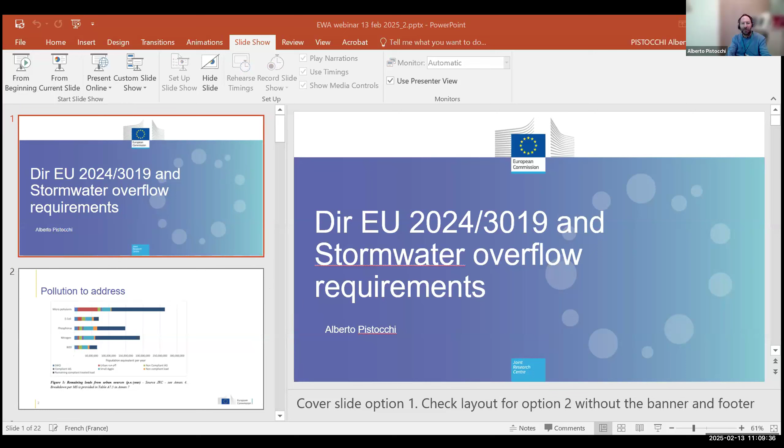That should be it. Can you see it now? Still, yeah, start it from the beginning just to see? No, it just does not switch into full screen mode. Maybe press F5. So we see you and we see the notes that you have at the bottom. Of course, it worked when we tried before we started. It's embarrassing, I'm sorry for this. Do you want me to share it on my side otherwise? Maybe it's easier. Yeah, I stop sharing then. Okay, thanks. So let me put that one here. Where I have it. I'm sorry. Let me find it again.

Yeah, maybe you can just explain quickly what JRC is while I look at your presentation, because I know it, but I'm not sure that everyone is familiar with the acronym. Yeah.

For those who are not familiar with the JRC, we are a Directorate General of the European Commission. We are tasked with handling, managing knowledge for policy. So we are a research organization, but we are also a knowledge management organization supporting all the policies of the Commission across the board. I'm particularly working in a unit dealing with water and ocean policies. So our angle is quite specific, but the JRC as such is a Directorate General of the Commission.

Particularly, we have been involved in the assessment of how the past directive was implemented and in the analysis of policy options that led eventually to the proposal of the recast directive. That is, of course, not the result of a scientific analysis alone, but rests on a number of assessments and quantitative policy analysis. If we can move to the next slide.

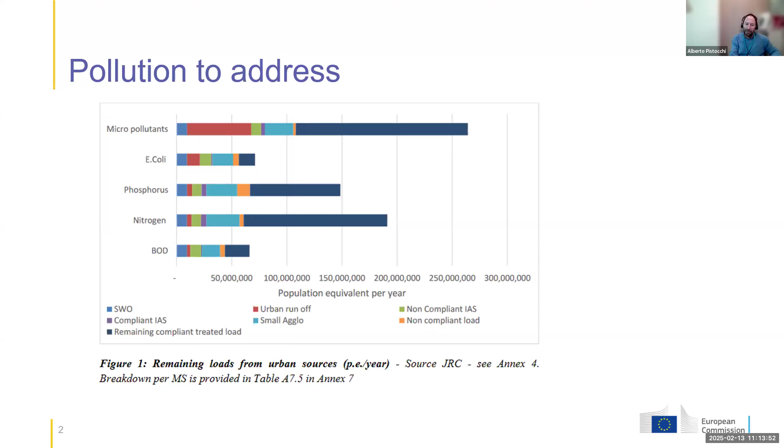Out of them, particularly micropollutants are a large component. Coliforms, pathogens, etc. Phosphorus is quite important, and nitrogen as well, whereas BOD is already treated to a large extent in all wastewater treatment systems. So what is out of the wastewater treatment plants is for now the most important component. If you move to the next slide.

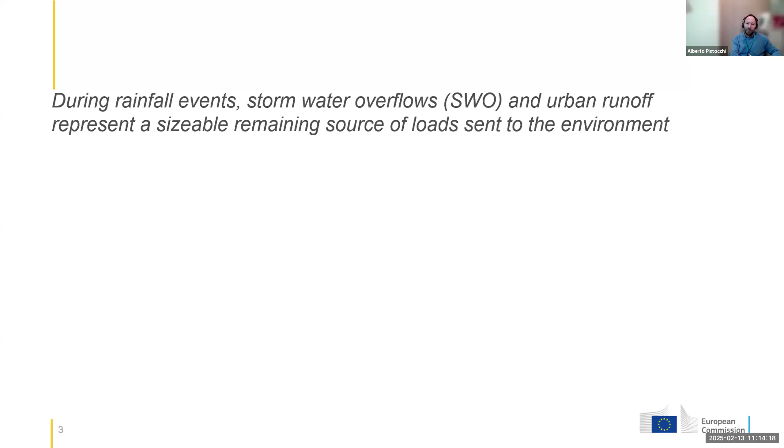Just a definition of what stormwater overflows are. This is a narrative in the impact assessment of the new directive that tells what we all know quite well, but just to focus on what's happening in our urban environments. During rainfall events, stormwater overflows and urban runoff represent a sizable remaining source of loads sent to the environment. These emissions are expected to increase due to the combined effect of urbanization and progressive change in the rain regime due to climate change.

Most of this pollution takes place during a relatively short period of time, bringing suddenly in the receiving water body a peak of untreated pollutants, including waste and litter from the streets, such as plastics and microplastics. Next. In case of heavy rain, we send directly to the environment part of stormwater overflows and urban runoff without any treatment. Next slide.

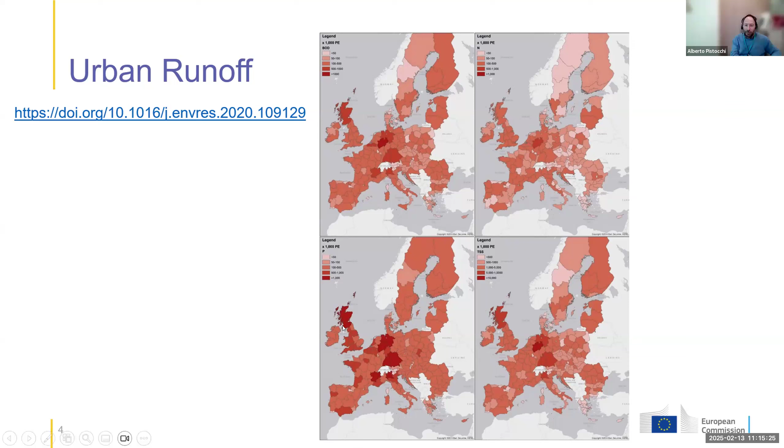This is an analysis that we had performed on how many population equivalents correspond to urban runoff, so only rainfall that runs off impervious urban surfaces, without passing through the buffering processes of natural soils. And you see that it's quite sizable. If you click, this is the distribution that, of course, corresponds to larger metropolitan areas and higher population density.

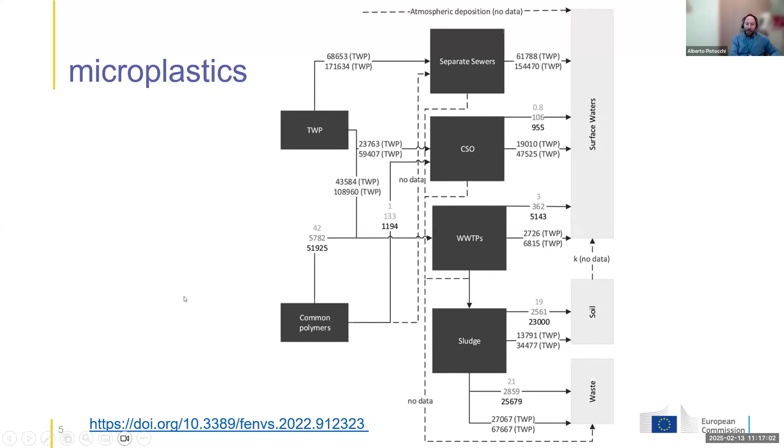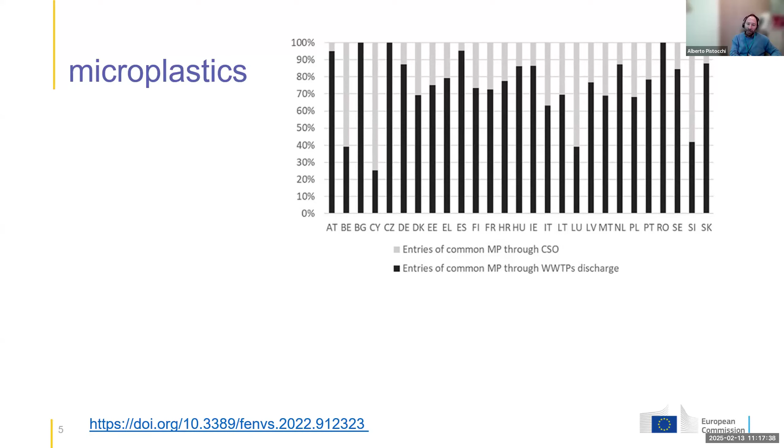But nevertheless, we tried, click please, to assess the relative responsibility of contribution to environmental loads of common microplastics, and you see that combined sewer overflows sometimes have a predominant role, sometimes they are less important depending on the countries and depending on how the combined sewer overflows are managed. So they can be predominant or not compared to the wastewater treatment plant discharges, but sometimes they are a problem. If you click next,

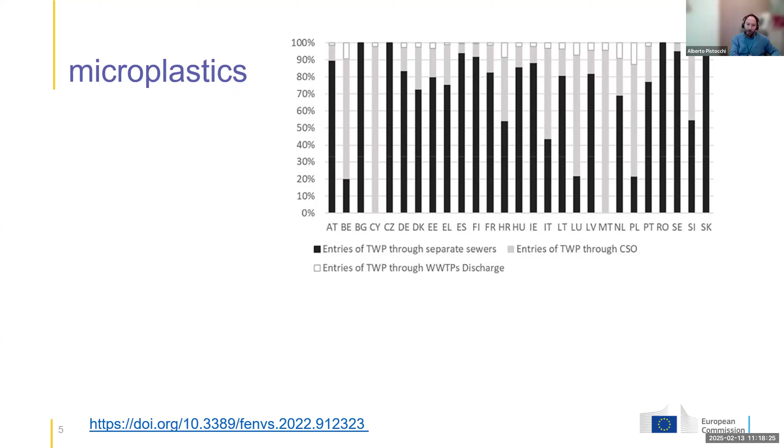when it comes to tire wear particles, not only combined sewer overflows represent an important pathway of loading to the environment, but CSO, combined sewer overflows, and discharge through wastewater treatment plants can be overridden by what comes through runoff. So what initially was considered basically almost as clean water in the old setup of the directive of 1991, that has been now recast with new provisions in the new directive. Click, please.

So what was the provision of the Urban Wastewater Treatment Directive in the past 30 years? Basically, collecting systems were supposed to collect and bring to the wastewater treatment plant household wastewater, so water that comes from excreta and from waste coming from domestic users. They could be combined with flows coming from rainfall or groundwater, but that was considered to be relatively exceptional, and there was no specific provision on how to handle the occasional overflows that were inevitable because of this combination of rainfall together with more stable discharges, more predictable discharges from households.

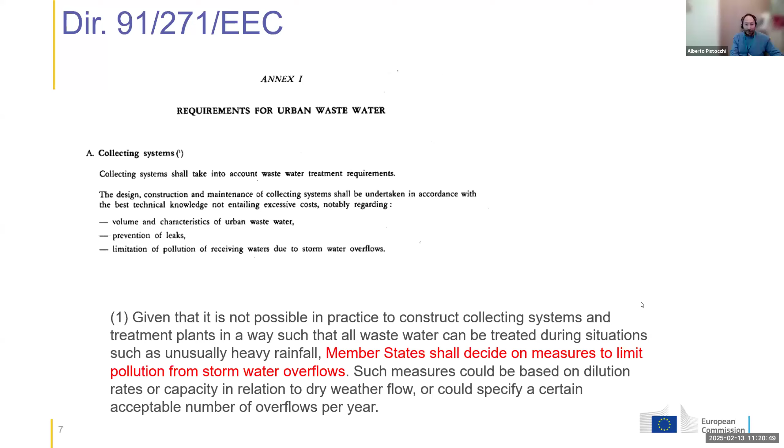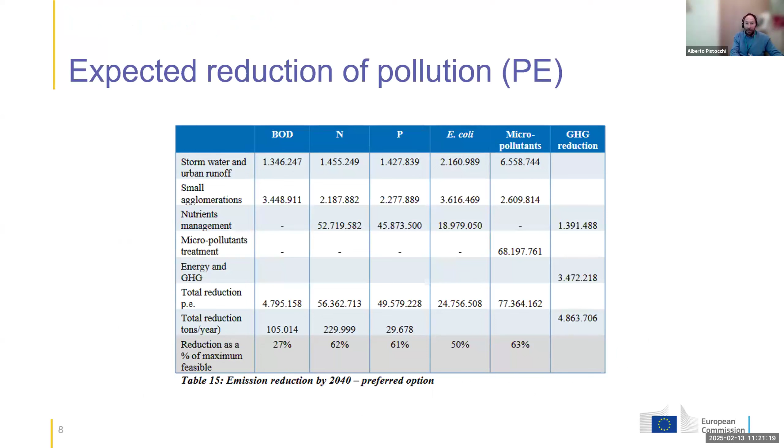Member states had the responsibility to decide on measures to limit pollution from stormwater overflows, including basically considering a minimum dilution rate when overflows were expected to happen. That was tantamount to what was foreseen in the old directive. Next slide. The new directive expects to address quite aggressively the remaining sources of pollution that I have highlighted above. So stormwater and urban runoff are supposed to be addressed substantially with homogeneous provisions applicable in the whole European Union that correspond to several million population equivalents depending on the contaminants that we are addressing. Next slide, please.

Urban wastewater, as you know, means, according to the recast directive, any of the following: domestic wastewater and the mixture of domestic wastewater and non-domestic, urban runoff, and everything together. Urban runoff is precipitation that is collected by combined or separate sewers, so it can be mixed with wastewater or not. And stormwater overflows mean discharge of untreated urban wastewater into receiving water from combined sewers caused by precipitation or system failures. So overflows may happen based on these two prerequisites. Next.

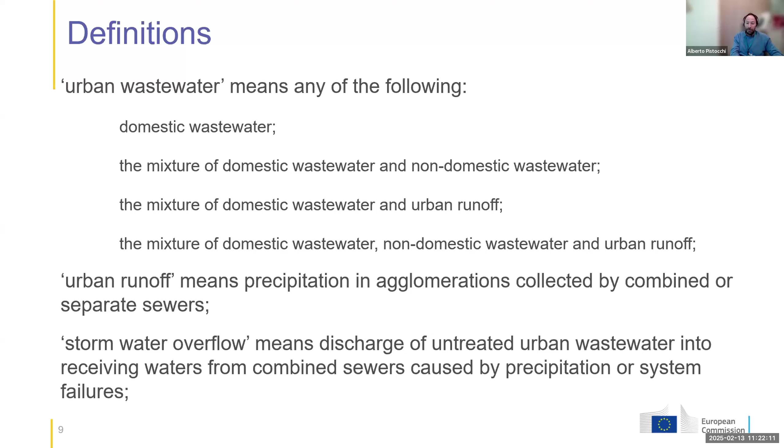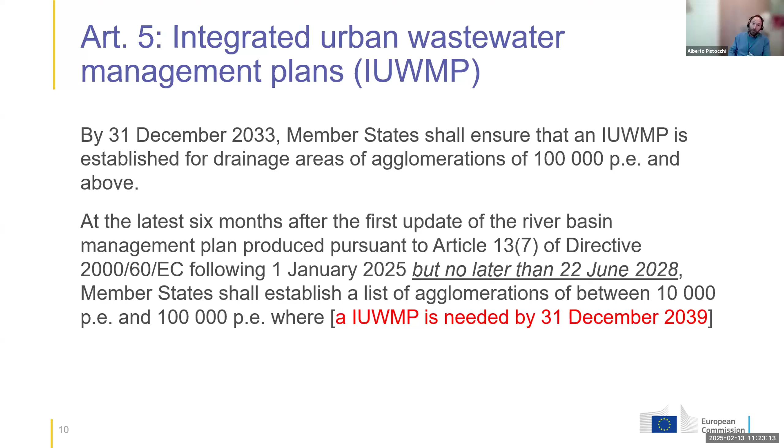Article 5 introduces basically the whole discipline of combined sewer overflows that are supposed to be addressed through integrated urban wastewater management plans for all large agglomerations above 100,000 population equivalents by 2033, so in 8 years' time. And for smaller agglomerations, based on the existence of specific conditions, for all agglomerations between 10,000 and 100,000 population equivalents 6 years later. And these smaller agglomerations need to be identified by member states according to guidelines on the assessment of risks that are being discussed now in the implementation phase of the Urban Wastewater Treatment Directive, but conforming to the principles already cast in the directive. Next slide.

For smaller agglomerations, a plan for stormwater overflows is needed when there is a risk for the environment or human health, and when stormwater overflows are identified to be a large component of the load to the environment. There's a threshold of 2% of the annual collected urban wastewater load calculated during dry weather, so assuming that rainfall is not discharging into the environment pollution coming from households or wastewater, domestic wastewater.

Relevant points, stormwater overflows should be addressed whenever they prevent the achievement of objectives of the water acquis. Sorry for the typo there.

The relevant points in separate sewers have been identified where urban runoff is expected to be polluted in such a way that its discharge can be considered a risk. So that's also another condition where a plan is needed when even simple runoff, so not mixed with domestic wastewater or industrial wastewater, can represent a source of pollution that poses risks. That's included in the directive, even though runoff per se is not considered to be wastewater according to the legislation.

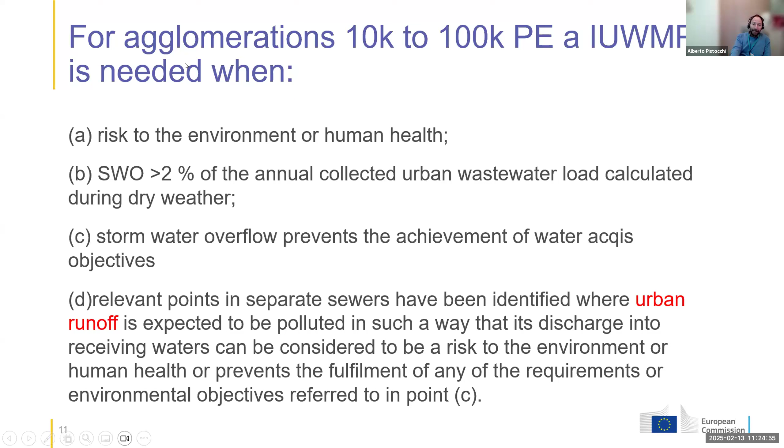Next slide. Next, sorry, Arthur.

Okay. These plans are supposed to contain basically an analysis of the situation, including what can be done with the existing infrastructure to mitigate and to control overflows, so to minimize the pollution released to the environment. And an analysis including climate projections and including an estimate of the pollution loads released into receiving waters in case of rainfall through an analysis that should be dynamic.

So in some cases it's possible to rely on very good monitoring networks, but most of the times the main approach to that is through a model, a calibrated hydrological hydraulic model of the network of a certain agglomeration.

For separate sewers, there's a requirement of including a detailed description of the monitoring requirements at relevant points of separate sewer systems where discharges of urban runoff are expected to be polluted. So basically identifying where there is a risk of pollution and what should be done in order to understand this pollution and characterize this pollution. Next slide, please.

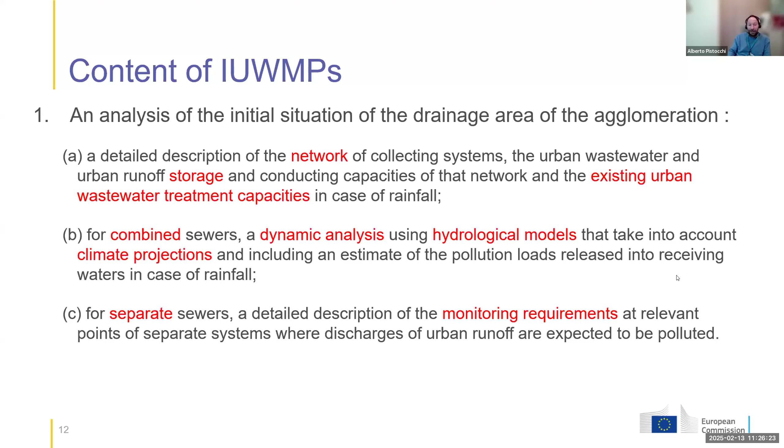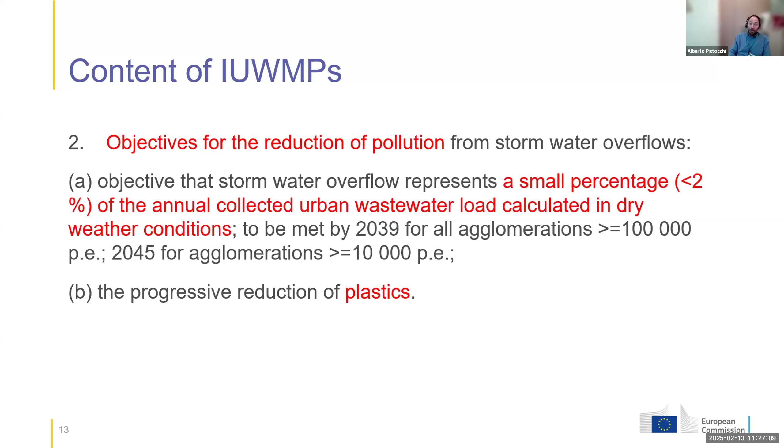Then the plan should lay out objectives for the reduction of pollution, and that is a complex topic. Basically, the plans should achieve that only a small percentage of the annual collected urban wastewater load, calculated in dry weather conditions, is released to the environment. Besides the progressive reduction of releases of microplastics, of plastics in general, to the environment. This small percentage should be less than 2% as an indicative target, and that has to be analyzed and discussed more specifically with reference to the specific situation in each urban water management plan.

Next slide, please. The measures to be taken to achieve the objectives need to be described in the plan together with a timeline for the implementation of those measures and a clear identification of the actors involved and their responsibility in the implementation of the integrated urban water management plan. Basically, this is an area where there will be a need to come together, the water operators, the municipality, governments, and urban planning in general, all the actors, urban developers, etc., that have to take into account the objective of minimizing releases to the environment.

So adopting measures that are not only in the form of pipes, tanks, pumping stations, and the like, but will mostly be through management of land, of urban land, in order to prevent the release of polluted waters from cities as far as possible. Next slide.

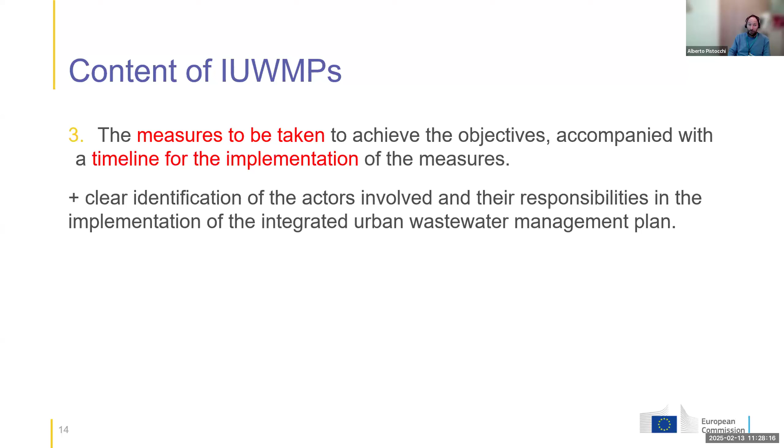When assessing the measures, that is what I was stressing now, the main focus should be on preventive measures, aiming at avoiding the entry of unpolluted rainwaters into collecting systems. Natural water retention, rainwater harvesting measures aimed at increasing green and blue spaces in urban areas that help reduce the loads to the networks and eventually to the environment.

Then, as a second priority, but still before embarking into any new infrastructural development, we should better manage and optimize existing infrastructure. There is scope for improvement in several situations where through, for instance, modeling and digitalization, automatization of the operation of certain infrastructure, you can improve the situation considerably, even though it's not addressing the problem to its full extent, probably.

And then only where necessary, adaptation or development of the infrastructure with priority to green and blue infrastructure, of course, but whenever needed, that's also the last resort option that is always available. Where relevant, water reuse shall be considered in the context of the development of these plans. So that's also a possible objective. Next slide.

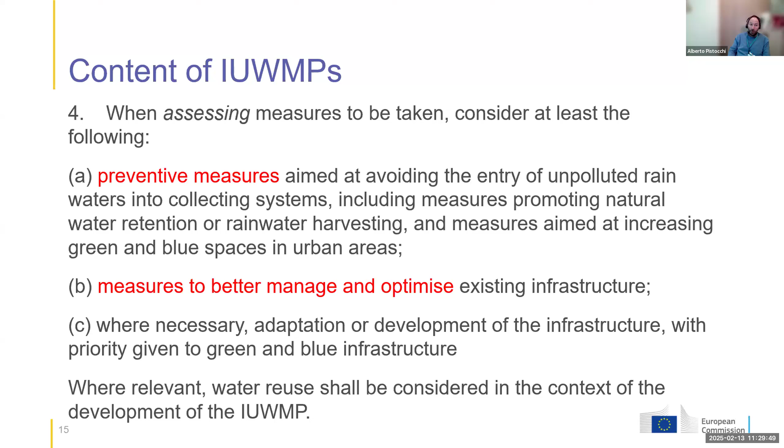This is a definition that we have. It's a very simple one: the dry weather flow content of an overflow. It's a definition that we have used in the assessment of policy options. Basically, even though rainfall that becomes runoff and is collected in combined sewer overflows is by no means unpolluted, so in some cases it can be highly polluted as well, a practical indicator turns out to be the content of wastewater that is associated to an overflow, and that can be calculated like this.

So it's the ratio of the dry weather discharge to the discharge measured in the combined sewers during a rainfall event. And this could be assumed to be the target. Basically, this content, summing up the content during all combined sewer overflow events in 1 year, should not be more than 2% of the dry weather flow in 1 year. That is what we were starting from as a possible indicator that, of course, needs to be elaborated upon a little bit more.

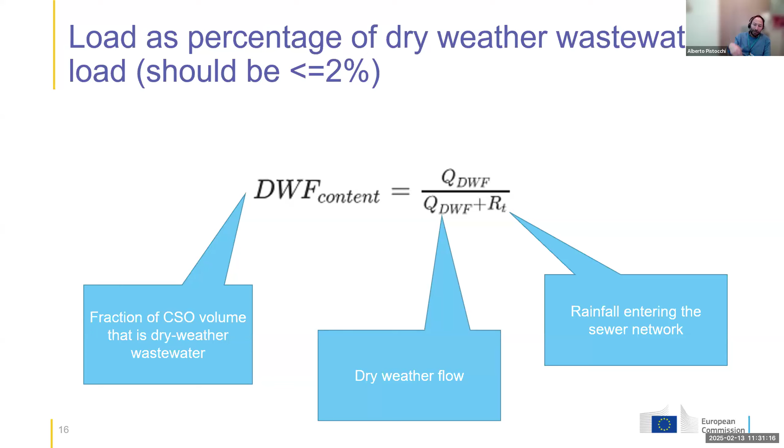Actually, indicators are rather well correlated when you start setting objectives for the urban water management plans, according at least to the experience that we have put together, and that will be a subject of further investigation in the development of the integrated urban water management plans. There are several possibilities to set practical indicators to manage overflows. For instance, one could look at the overall duration of overflows in 1 year, expressed in hours of overflow, the ratio of dry weather flow discharged to the environment as a fraction of the total dry weather flow discharged by the agglomeration through the wastewater treatment plant,

and the overall volume of combined sewer overflows, so the volume that you materially measure at the overflow point with a measurement device or estimated in another way. According to our calculations, all these indicators are relatively well correlated, so we will address the topic in the coming months when we will have to agree with the member states on harmonized ways to develop these integrated urban water management plans and setting indicators. But we expect that the indicators already adopted in several member states or regions could be recalibrated in order to be useful directly for checking these objectives. So that's to be discussed further on.

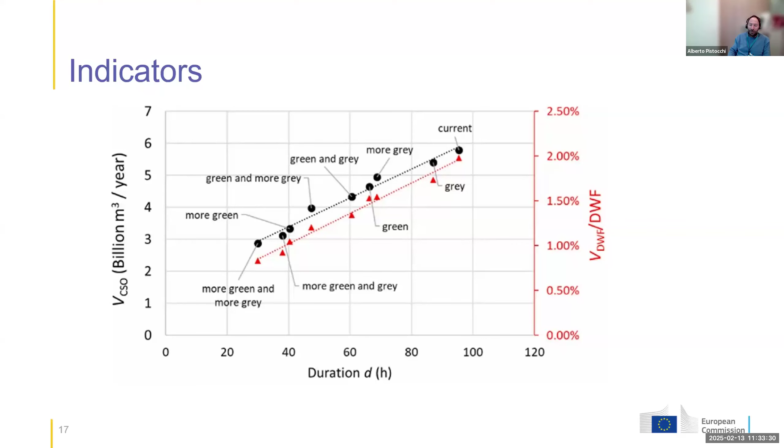For the time being, we have conducted some preliminary assessment of what it takes to reduce combined sewer overflows. The next slide shows, if you can move to the next slide, that you can reduce the untreated combined sewer overflow volume considerably through different strategies, starting from the current situation using grey infrastructure to different extents, using green infrastructure, so greening cities and maximizing the buffering capacities of urban surfaces, combining the two, or providing treatment to combined sewer overflows before they are eventually released to the water bodies downstream.

So that could also be an option, of course: if you don't have the possibility to reduce the pollution upstream, you can still implement a treatment system at the point of release and then release the water after cleaning. That is equivalent to removing part of the load, of course, and it's the third priority that we have mentioned, infrastructure with a preference for blue and green infrastructure.

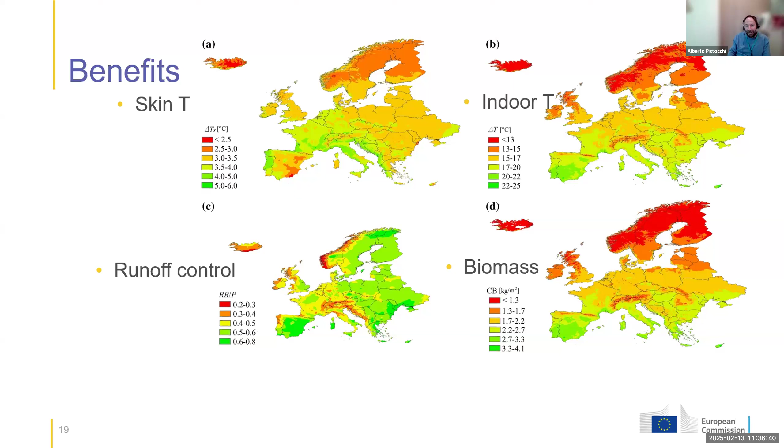We have quantified some of the benefits in monetary terms, but there are benefits that we didn't quantify and that could be even more important, for instance, in terms of improvement of the urban landscape and the attractiveness also for real estate, for urban properties. That's all to be considered when developing an integrated urban water management plan that will call for close collaboration with urban planning at this stage, and that will be essential not only to achieve efficient solutions, but also to minimize the burdens for the water operators, sharing the budgets as broadly as possible among the various actors interested in the initiative in urban areas.

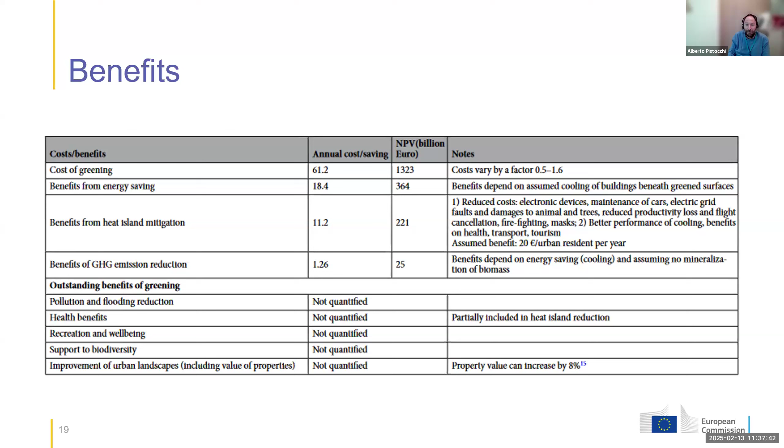The provisions on stormwater overflow management in cities have also side effects that can be very positive. I mention here two important aspects, but there can be more, of course. On energy neutrality, less diluted wastewater, as we expect from some of the measures that will be implemented, will lead to easier to use carbon in the wastewater that could facilitate energy recovery.

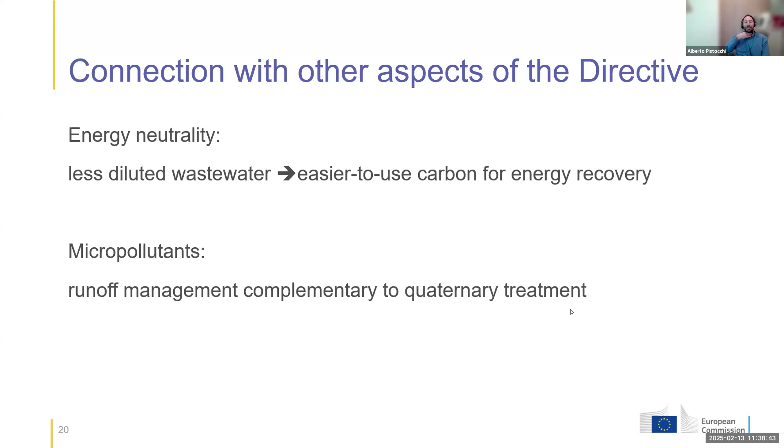So urban runoff is a problem to address that is further exacerbated by combined sewer overflows. The new directive doesn't set stiff requirements. It aims at triggering a process centered around urban wastewater management plans that requires integrating water management in urban planning to an extent that is much broader than current practice in many urban areas, of course, with a few or many very good exceptions.

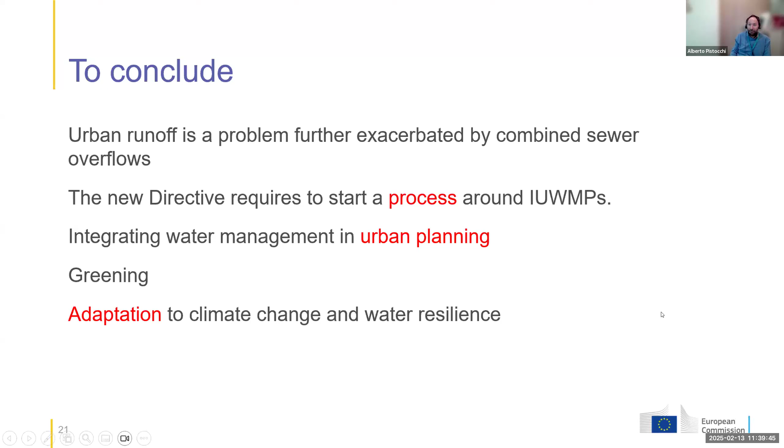There is a prominent role of urban greening in addressing these challenges, and there are clear implications for adaptation to climate change and water resilience that this provision of the Urban Wastewater Treatment Directive contributes to prominently. That is it from my side.

Thank you, and sorry for spilling over a little on my allocated time, but happy to address questions later. Yeah, thank you very much, Alberto. As mentioned earlier, I think I see some questions already on the chat. I think I will already leave the floor to Anna directly, so to ensure that all speakers have time, and we'll take the questions after it.

So Anna, you are born and raised in Berlin. You studied environmental engineering at the Technical University Berlin. Since then, you have been involved in sustainable resource management projects, with closing local nutrient cycles, recycling greywater, or decentralized management of rainwater. You have worked both in Berlin and abroad in development cooperation and humanitarian aid projects.

And since July last year, you have been part of the Berlin Rainwater Agency and support the implementation of the Sponge City Berlin. And your presentation title is Decentralized Stormwater Management in Berlin: Challenges, Politics and Participation. So Anna, the floor is yours.

Okay, thank you very much. I will share my presentation. Can you see it? Yeah, it's working. Okay, great. So, thank you for the invitation. And thank you for the very interesting talk that we had before.

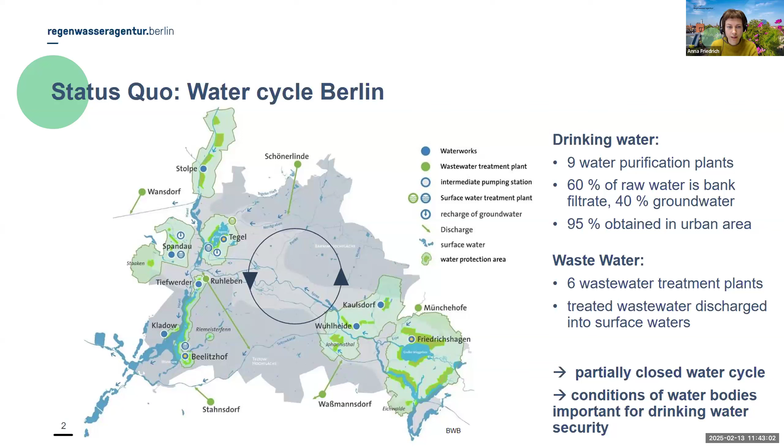And because of this, it's important to know that the condition, meaning the quality and the quantity of the water bodies in Berlin, is important for its ecology, but also for the provision of drinking water. In Berlin, we face different challenges, one is the quantity. What's important to know is that we expect a reduced water inflow, which we can already feel, but it's getting more because of the end of the coal mining until latest 2038.

And so the water was pumped from there into the Spree River and thus being available for the city of Berlin. It's important to know that nowadays between 50 and 70% of the water flowing in the Spree is coming from this region. And as the holes will get flooded now, or they start already to flood them, the water will be missing in the Spree River, and as a result, we will have less water coming to Berlin, and also dry periods in the Spree can be expected in the future.

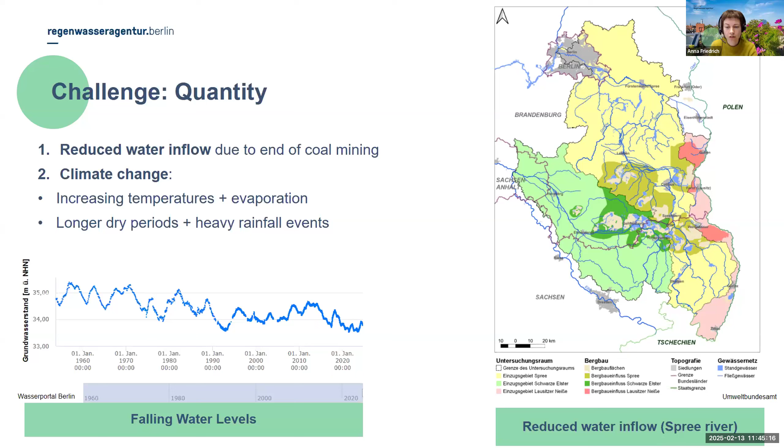It's changing now. And additionally, it's also important to say that all cities all over the world, and not only cities, but also more rural areas, are facing the effects of climate change. And by that, increasing heat and evaporation, and also more dry periods and heavy rainfall events.

And the combined sewer system, as we all know, is the combination of household wastewater and rainwater, which is collected together. And it's inside the city because it's historically old and was built between 1873 and 1909. So the water is collected there together. And in the city of Berlin, we have the problem that the surface has got more sealed in the last 150 years since the sewer was built, and the runoff is also increasing.

And as we have limited capacities in the wastewater treatment plants where the mixed wastewater is going through, the limitation actually is the biology of the wastewater treatment plants, and it's able to treat only 2 times the dry weather influx, which means for the combined sewer system, only 0.4 liter of rain per square meter and hour, which is nothing. So almost every time it rains in Berlin, the combined sewer system results in an overflow into the surface waters.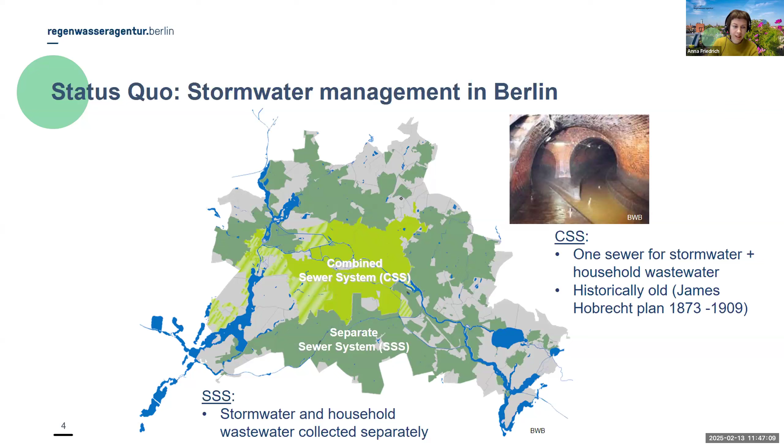And this problem will increase, as I said, because of less water running into the Spree and higher temperatures in the surface waters. So the problems we already face of eutrophication and fish mortality will increase in the future.

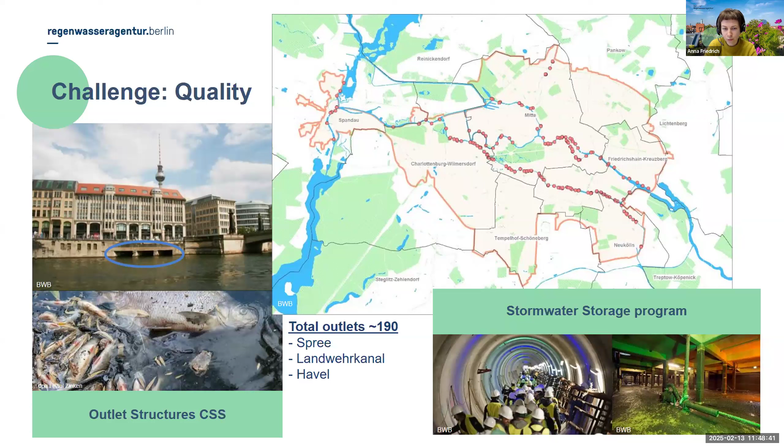Berliner Wasserbetriebe, the Berlin Water Agency, did a stormwater program starting in the 1990s to decrease the amount of overflows and created 300,000 cubic meters of space underground. But it's important: this program has ended now, it was built over 30 years, and the extra space that was created is already consumed by more sealing, climate change, and so on. So compared to 1998, when the program started, there's no difference in overflow.

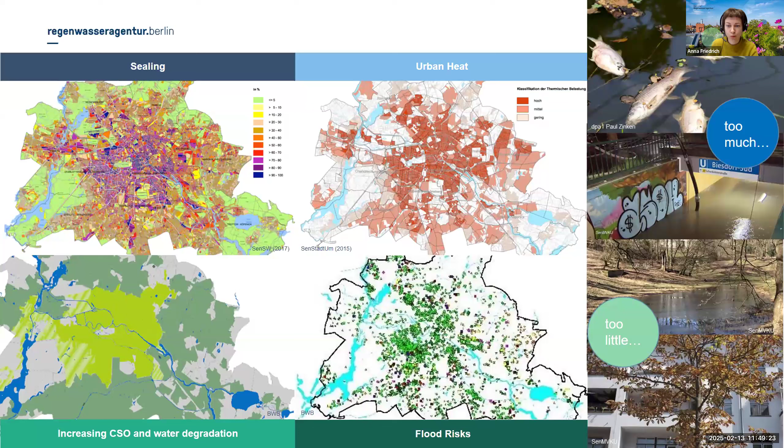So we come to the strategy of decentralized rainwater management for what we can call a sponge city. So the idea is to change the water management of Berlin to get closer to the natural one, which means that we reduce the runoffs and instead retain the water, infiltrate it to recharge the groundwater, but also to make it plant available, to evaporate the water from surfaces, from plants to cool the city, but also to utilize the water, for example, for toilet flushing, watering the garden or laundry, to substitute drinking water.

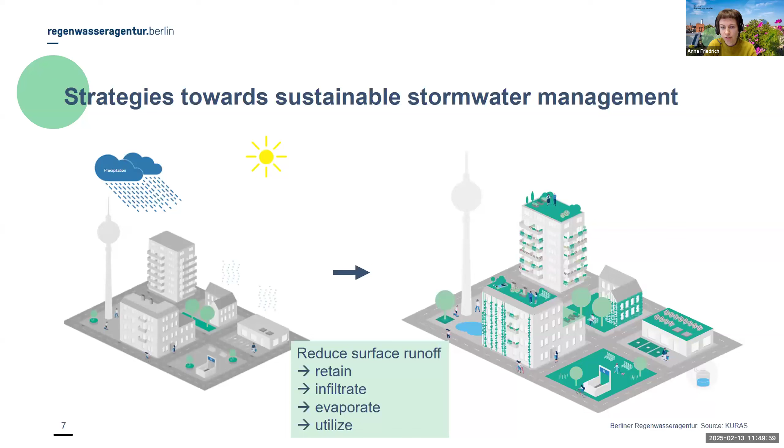And about Berlin, it's important to know that in 2016, this was the first time that this was implemented in the coalition agreement of the Berlin city government. And it was written that there's the need to advance decentralized rainwater management as an effective part of climate change impact adaptation. And as a specific measure, it was written that new urbanization zones should all be developed with decentralized stormwater management. And for areas connected to the combined sewer system, there should be 1% annual disconnection of the surfaces connected to it, which did not work out because it would be 70 hectares per year. And just as a teaser, unfortunately, it was more of a political aim.

And additionally, there was a fund created, the 1,000 green roofs program, especially for the inner part of the city where there's a lot of competition for space, to fund people doing green roofs for retaining rainwater there and evaporating it in the city. And additionally, it was said to found the Berlin Rainwater Agency, Berliner Regenwasseragentur, where I'm working, to implement all these strategies, because it's not only that the ideas are there, it needs a combination of stakeholders, of the administration, of politics, of governmental things. So the Berlin Rainwater Agency was founded to implement these things and to do everything so that it comes into implementation.

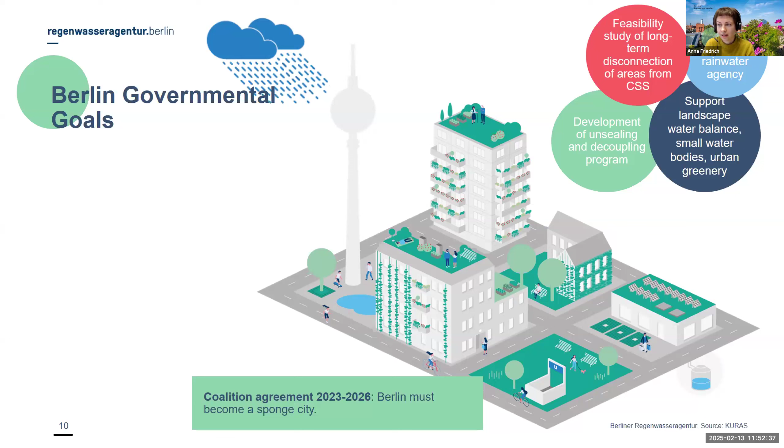Maybe I don't go into all the details because it's taking too long, but in the next coalition agreement, the term water sensitive urban development was written down, and Sponge City was named for the first time. And the expansion of the green roof program to green facades and other programs were written down. And in the last coalition agreement in 2023, it was written Berlin must become a sponge city. And also more specific things, like for the combined sewer system, there should be a feasibility study of long-term disconnection of all areas from the combined sewer system. And funding was broadened to also include unsealing and decoupling programs from the combined sewer.

At the same time, it's important that in the Berlin environmental administration, there were some regulations that came out. They are called BReWa-BE in German, Begrenzung von Regenwassereinleitung bei Bauvorhaben in Berlin, which means that decentralized rainwater management became the default for construction projects. It must be ensured through planning precautions from the beginning on. And this applies likewise to new building zones and construction projects in built-up areas, and on private and public land. And in the beginning, it was said that the maximum discharge into the sewer system could be between 2 to 10 liters per second and hectare, depending on which area in the city you are and which river you are discharging into.

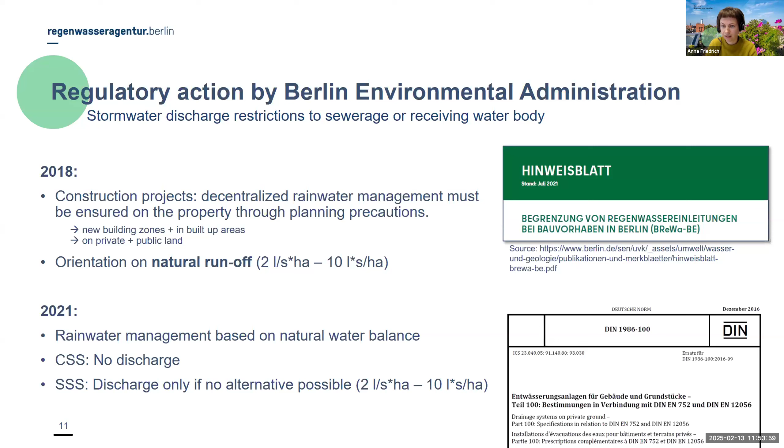And in 2021, this was even tightened, so that for the combined sewer system, no discharge was allowed anymore, not at all. And for the separate sewer system, if you can prove that there's no alternative possible, you can discharge maximum 2 to 10 liters per second per hectare, which means maximum 1 liter per second in practice.

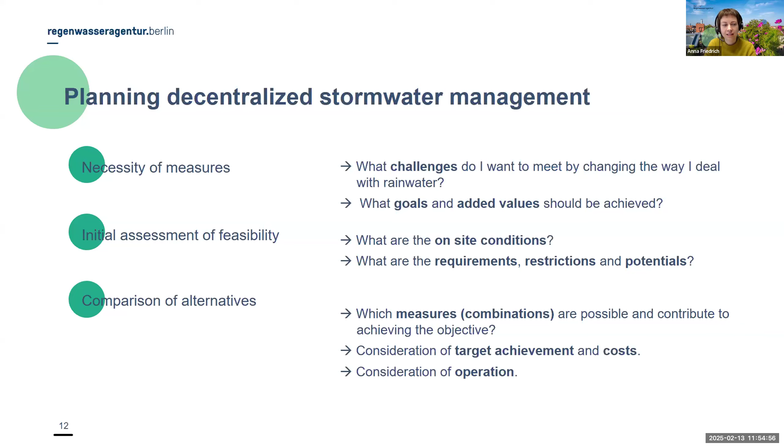So we come to how we do the planning of decentralized stormwater management. First of all, we always say it depends on the necessity and the goal of the measures. So first, talk about the challenges, for example, reducing the runoff due to obligations, or because people want to reduce the runoff themselves to reduce the stormwater fees, for example, and utilize the water themselves. And also think about goals and added values which come aside, for example, inside the city to have higher evaporation for cooling and lowering air pollution, and for the outskirts, reducing drinking water use by replacing it with stormwater. Maybe I don't go into the details. It's doing an initial assessment of feasibility and in the end a comparison of different alternatives.

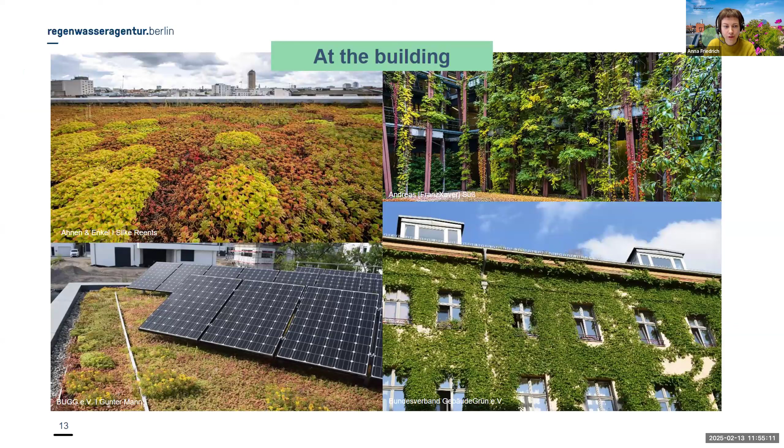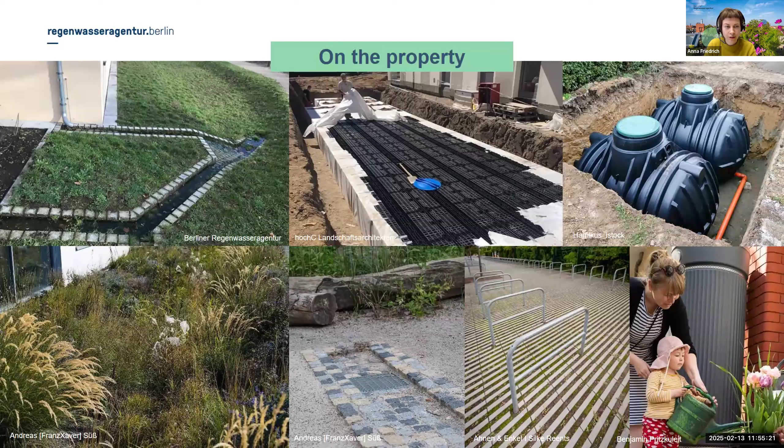So I guess all of you know that there are different measures. So I just give some impressions from Berlin. Either at the building, being green roofs or facades, also in combination with photovoltaics, or on the property, like the collection of rainwater or infiltration into the ground, or in public spaces, or also in cascades, depending on where you are, which surfaces, what you can do.

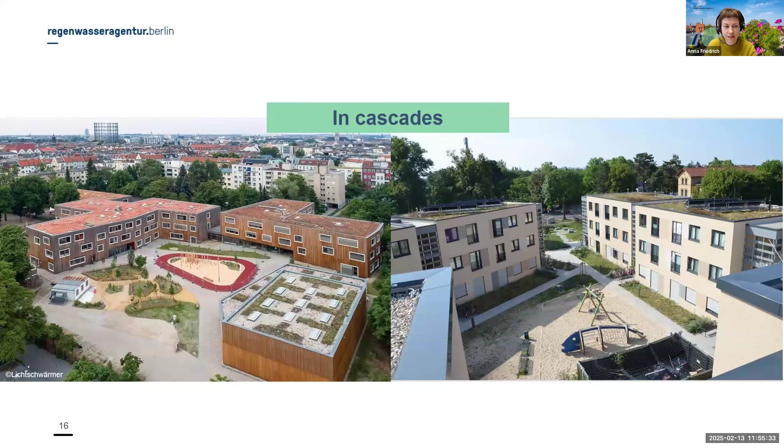Coming to the task of Berliner Regenwasseragentur. So as I was saying, the task of Berliner Regenwasseragentur in general is to implement the sponge city in Berlin, which means supporting stakeholders to do the transformation into a sponge city. So to convince them to join, to empower them to take their role, and to facilitate the cooperation between them. So we have different services.

The first is that we have a free consultancy for people from Berlin, unfortunately only, because we are paid by the Berlin government. So if property owners come to us and tell us, we are not allowed anymore to discharge our rainwater, what can I do? We have consultancy, so we have a look at the property. What is the condition of the surface where the water is collected from? Is there the need to infiltrate it? How are the soil conditions? How are the legal conditions? How is it financially? So we give a first advice of what might be the possibilities on the respective properties.

Additionally, for urban development processes, so when new urban areas are built, we are involved from the beginning on to make sure that the decentralized rainwater management is ensured on the property. Additionally, after our consultancy, depending on how complex it is, we also offer support on our webpage with a search for specialists, e.g. engineering offices or landscape architects, depending on what the measures should be.

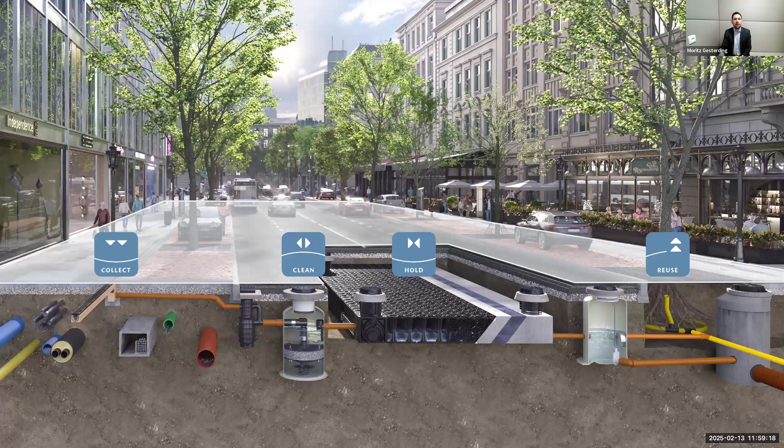So I will start my presentation and start sharing. Oops. Share screen. So Arthur, let me know. Yeah, perfect. My screen can be seen, so you can see the road and everything.

Perfect. So we as manufacturer define the tasks that we need to fulfill in order to achieve a water-wise city from the technical point of view under these 4 tiles: collect, clean, hold, and reuse. You could also say drainage, purification of the water, store the water somehow, and then the reuse. It's not in the traditional sense as we're now discussing, and I think the wastewater framework directive also opens it to direct water reuse from wastewater treatment plants. It's reuse, but more in the sense of putting the stormwater into usage, as Anna already presented. So not in the traditional sense.

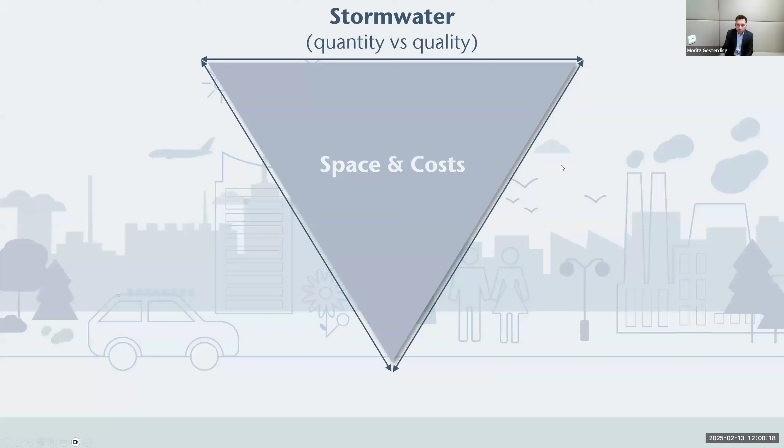And these are the main tasks where we see the need to develop products for. And then we have the underlying requirements or goals we want to achieve with these 4 product tasks. So the first one is, of course, the quantity management. This is coming from the traditional drainage. We need to protect people, traffic. It's for safety. We need to deal with floods, but, as has also been mentioned already, the focus is shifting, it's also managing drought. So quantity management is not anymore just getting the water away, but also keeping the water in the cities.

And of course, the parameters that are relevant for product design and choosing the right product for the application are then the rain intensity and duration, what kind of retention volume is needed, and then in connection to the quality, also full flow or bypass treatment.

And especially, this is something very interesting that Anna mentioned as well, what we, of course, as a company based in Germany, are very well aware of, are the requirements of the maximum amount of water you're allowed to discharge. And I think 2 to 10 liters per second hectare, where you're coming from originally, is not a lot of water. So we need to think about how we manage the quantity by retaining it and then releasing it. And of course, interconnected to it is the quality.

Where we as a company originally come from, our treatment products are EN858 oil separators, light liquid separators. So the hydrocarbons back in the days, I would say, were our main target. Now, for several years already, we see the shift to other pollutants like heavy metals, polyaromatic hydrocarbons, or the TSS with tire abrasions and everything which is connected to it, of course, microplastic, and the other micropollutants attaching to these particles.

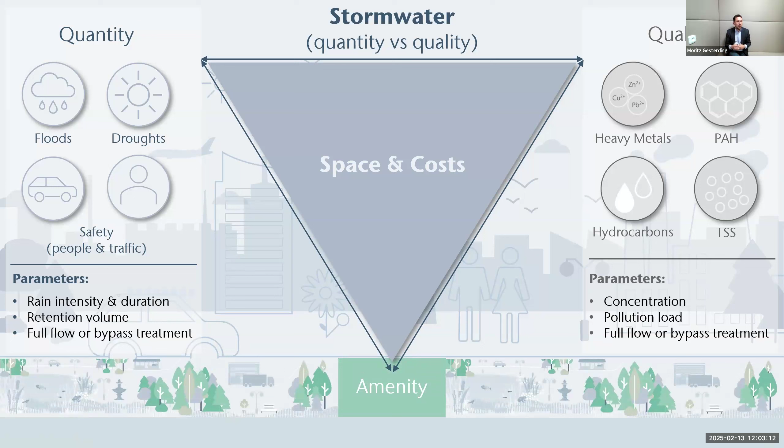And the last thing we want, of course, to achieve is we added now the amenity. We want to make our cities more livable. We want to have the green infrastructure. We need to cool our cities. We, in times of droughts, need to be able to have the water on site and deliver it to the plants and urban scenery and so on.

And I'm actually not sure what the right English word for it is. In German, we call it Spannungsdreieck. I would now translate it as the triangle of tension, because it's really difficult to achieve all three at one time. And especially because you have the space and cost constraints. So for the amenity, green solutions are always the preferable one, but you need a lot of space. And then, of course, we are all aware water quality costs. So the better I treat my water with full flow treatment, the higher the cost. And then the same goes for quantity management.

So it's really a decision, in my point of view, where you need to look at each single project, where you draw the line and where you position yourself in this triangle. And also, of course, then choose the according products, or let's say, design solutions, and treatment quantity and quality solutions, which you need to fulfill the goals you want for the specific project.

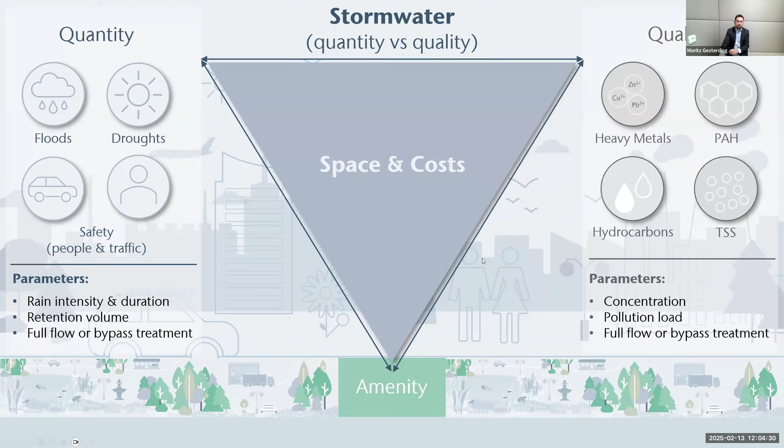However, what I would like to point out from the manufacturer's perspective, these guidelines all define treatment goals and influent concentration or maximum pollution loads, but they don't tell you how to treat the water, and they rarely define any specific testing requirements to actually prove how your product is working. So this might sound a little bit unusual coming from the industry, but I'm very much in favor that we get more regulations and clearer guidelines here.

So it's kind of a plea to all involved parties here, authorities and according actors, to work on clear guidelines so all involved actors can compare solutions and actually be able, based on solid results and solid data, to choose the right treatment and management option for their product in order to protect our precious water resources.

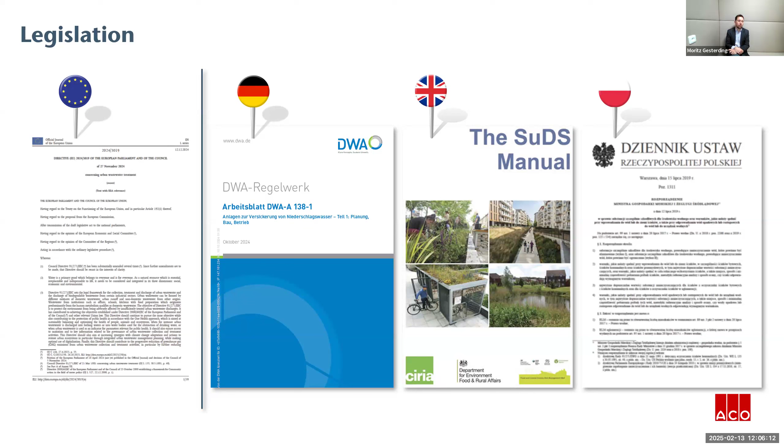And of course, everything is then related. I now adapted here our journey to holistic systems, coming from traditional drainage and then moving to water sensitive cities, sponge cities. So the topic what we're talking about and where we come from, we adapted now, let's say, the gray infrastructure.

We have traditionally sealed surface. Back in the days, it was made quite simple. You seal the surface, you drain the water somehow, you put it to the sewer network with the consequences of combined sewer overflow. We've seen that in the presentation of Alberto. Anna also mentioned it as well, with the negative consequences, with the high pollution loads going into the water.

And we want to shift, adapted with the goal of open surfaces. We want to drain with direct discharge to receiving water, direct infiltration, attenuation, to reduce pressure on the sewage network, and very importantly, of course, a combination of the above to make the water usable within our cities and actually do something with it, not just get it away, but do something with it.

And this has, of course, a consequence on the products or design solutions we need for that, because we need an according stormwater quality and quantity management. From the gray solutions, we got basins where you could have treatment options in there, pumping stations. We have geocellular crates to hold back the water.

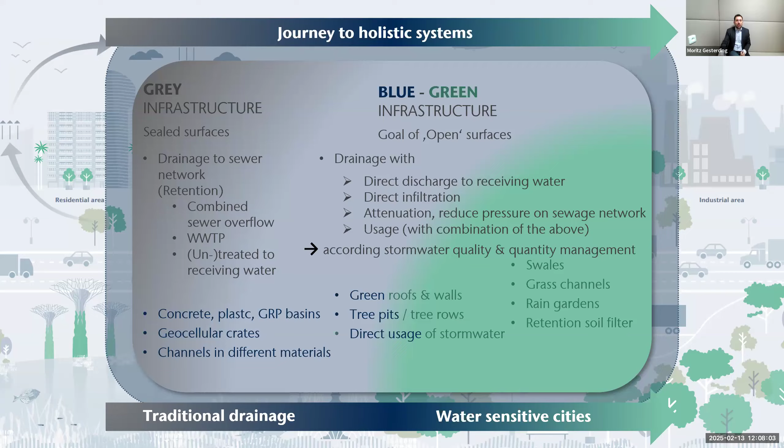So what we want to achieve, ideally, I would say looks a little bit like this. We have amenity, we have livability in the city, we have clear water management, you make the water usable within the city, you collect it, you have the open surfaces, you reduce the pressure on the sewer networks. But the problem here is, of course, as I said before, space and cost restraints.

So often we are not able to implement a project like this, and we then are required to use gray solutions, in my wording now, manufactured, industrialized solutions. And there I would like to point out one important thing. It is really relevant to think ahead in the early planning stage about what you want to achieve, how much green you can put into the project, and what kind of product solutions you need.

I drew some sketches in PowerPoint just to illustrate it a little bit. There would be different channel options. So you can just collect the water with the channels and transport it, or you could have some retention volume already in the channel and move your retention load to the beginning with channels and not at the end. Then you would have different treatment options depending on what kind of water quality you need.

But also, as I said, as there are no clear product guidelines, these products look really different. You have options in the shaft, with a footprint of a few square meters. You have other treatment options achieving the same goal with different setups. So if you do not think about that in the beginning of the project, it makes it really complicated at the end to change something there.

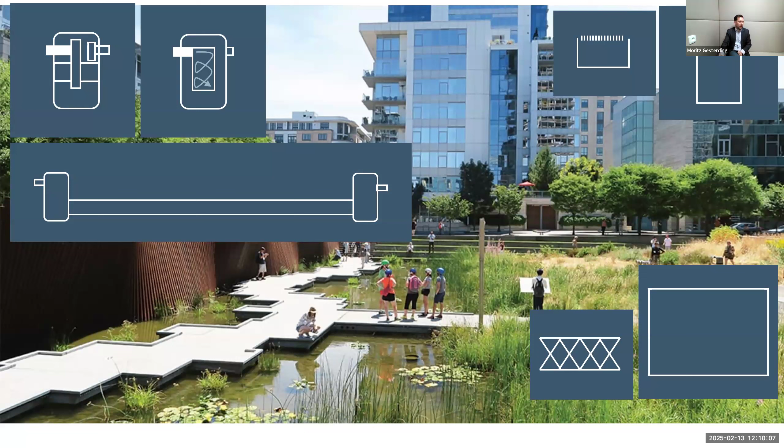And then, of course, at the end, to store the water, you have geocellular crates, you have concrete basins, and again, different requirements for the installation. So this is just my plea at the moment for everybody out there. If you design these projects, think about it in the early beginning, because we often encounter it in our daily practical life as a manufacturer, that advising at a later stage of the project, it's really difficult to have the full options there.

And then if everything comes together, this is something we would like to achieve. This is a project ACO realized in the city of Raalte in the Netherlands. There was a clear commitment from the local authorities. All the stakeholders came together at an early stage to discuss what shall be done. And then you really have the closed water cycle.

You can collect the water, you treat it, you store it, and then you put it into usage. And here it's even with additional drinking water supply, which is not ideal, but also something you could think about in order to make the greenery work at the top.

And a colleague of mine came up with a really nice sentence, and I like to say it here. From our point, let the gray do the heavy work. So if you don't have space to implement everything in green solutions, think about where you can have pre-manufactured product solutions that do the heavy work, and then let the greenery shine on the top, and underground, where nobody can see it, the heavy work is done.